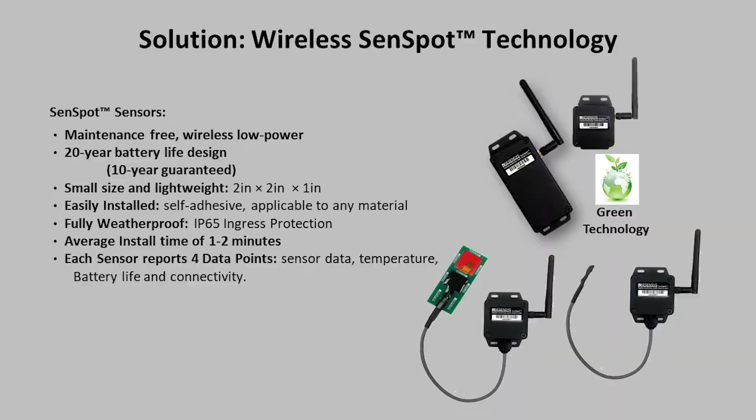So how Resensys works: you're going to put your sensors out on the structure at key points identified. That data goes to a gateway, which is solar powered, about 1.5 feet by 1 foot, small footprint. It has a backup battery for 60 days, so should you be short on sunshine or need power, it has a backup, and it also backs up the data. It can also be connected directly over Ethernet or fiber optic should you have it.

That then goes to a cloud server, an Amazon S3 cloud server, and can be transmitted to the SenScope software. The data can also be pulled directly from the server should you want to use it in your own program or interpret it differently. The Resensys system is highly reliable.

From the data in the field that we have, it's 99.9% readily available. There's a wide spectrum of sensing features. You can do strain, tilt, inclination, displacement, vibration. It's a cloud-based data management system with real-time automated detection.

Rather than give you hundreds of alerts that you really don't want, the software uses AI and algorithms to identify the normal movement of your structure. After about a month or two, it learns that, and you can set threshold values - I'd only like to be informed should this event occur, or it comes out of the threshold value.

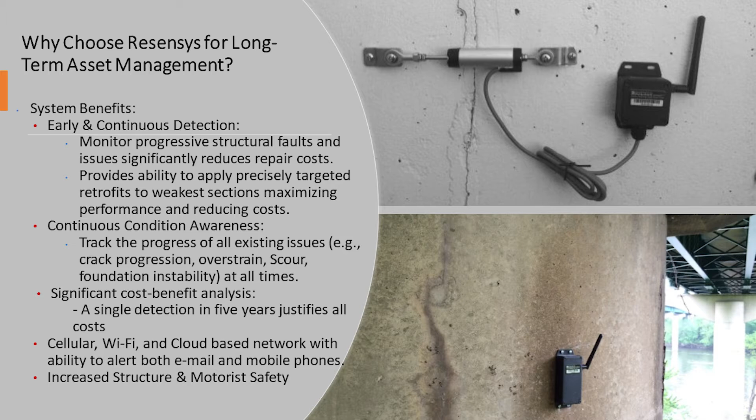It's continuous, and it's also very cost effective, much less than any fiber optic sensor system that's out there. It's a very flexible system - you can use it over cellular connection, fiber optic if you have that on the bridge, and for extremely remote locations, we can do satellite-based communication.

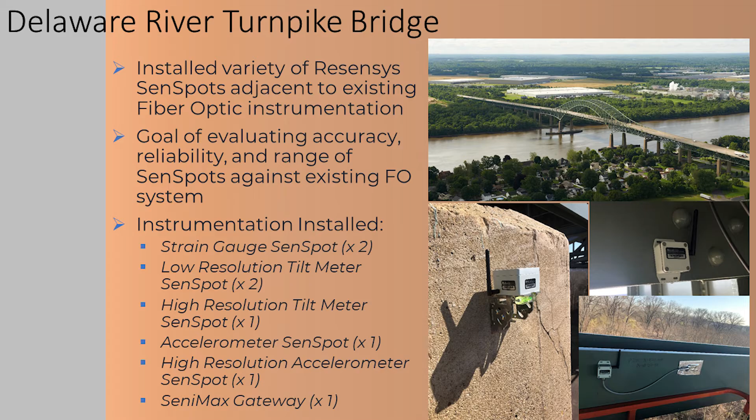One of the most important case studies we did was a direct comparison with a fiber optic system. This was done with WSP and the Delaware River Turnpike Bridge. We came to them a little late in the process, and they were kind of blown away and said, why didn't we know about this? They had already installed the fiber optic sensors, and out of interest, they did a side-by-side comparison with our product. These were the results of the comparison.

You can take all of the data and interpret it any way you want. It's a very friendly user interface.

So if you want to know what your structure was doing at this point last year or five years ago and compare the differences, you can do that.

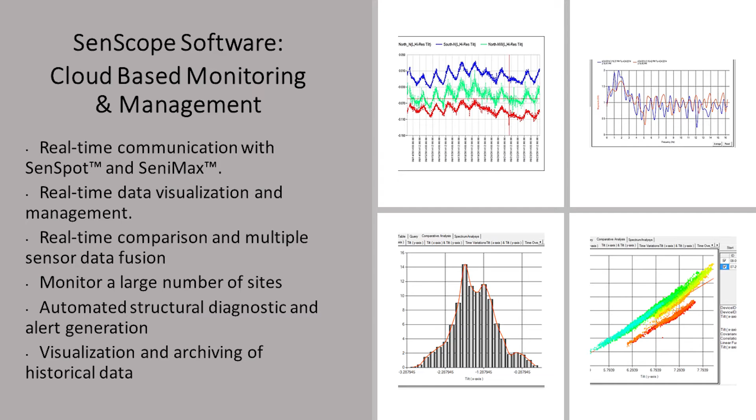You can then view those results. Typically you view it like this, the first top left, but you can then view those results as a chart

For structural applications, we can do bridge piers and abutments, monitor settling, instability, tilt. For the superstructures, strain, vertical displacement, deformation. We can monitor bearings and joints in every aspect - tilt, temperature, strain.

We can monitor vibration and tension in cables. We can also monitor scour now. We have a specialty scour probe that's been in development for some time.

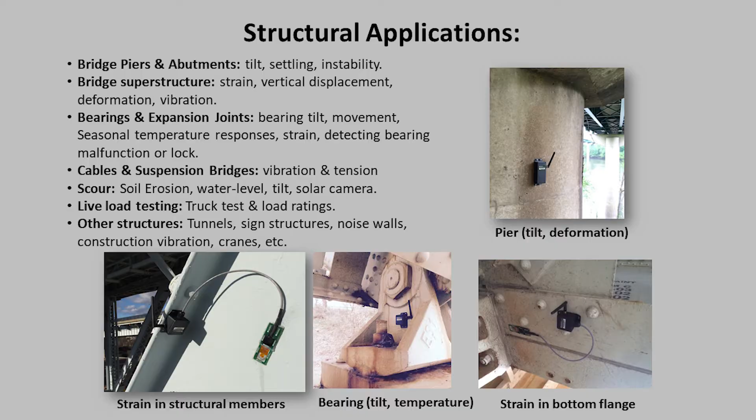We can perform live load testing, tell you when a live load vehicle is going over your bridge and actually take a picture of it. Lots of other structures - tunnels, cranes, buildings.

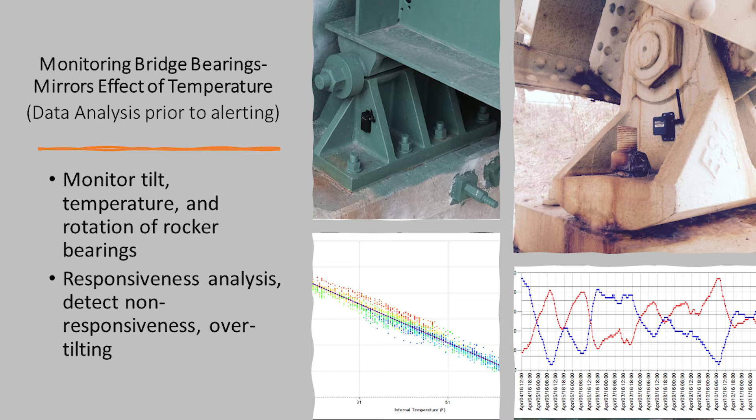It's an example of monitoring bridge bearings. In the bottom right, you'll see this is what a healthy bearing looks like. So you have temperature inverse to the bearing movement.

As I said, we can do long-term live load testing, and we did this very successfully, inexpensively on the Robert Norris Bridge in Virginia.

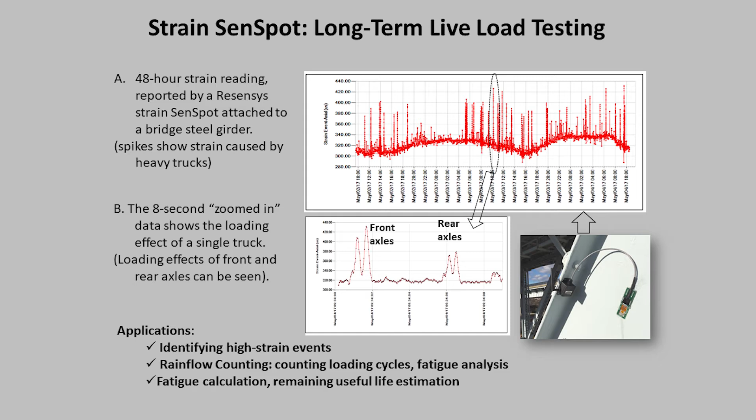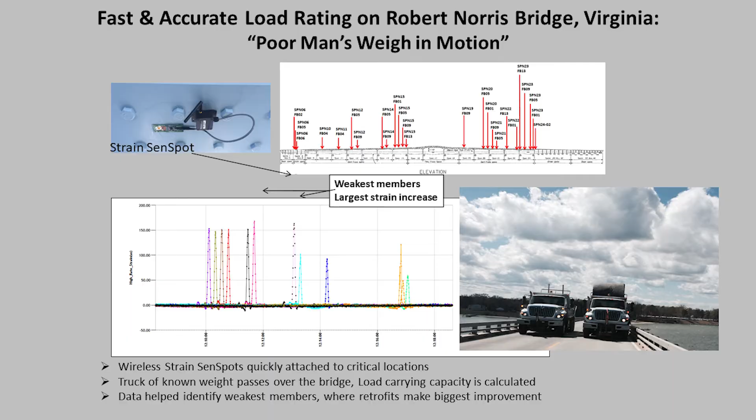They were considering doing a repair and wanted to know where to best focus their assets and funds. So we put out several sensors on the structure, drove two 83,000-pound vehicles over, so they knew exactly how much and where their weakest points were, and they made the retrofit.

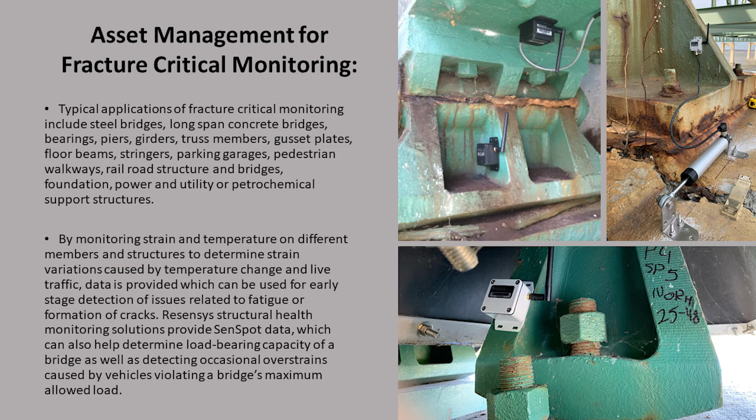Asset management for fracture critical monitoring. By the time you're seeing a fracture in your structure, it's essentially already too late. The costs are much greater than if you can detect that weakness earlier.

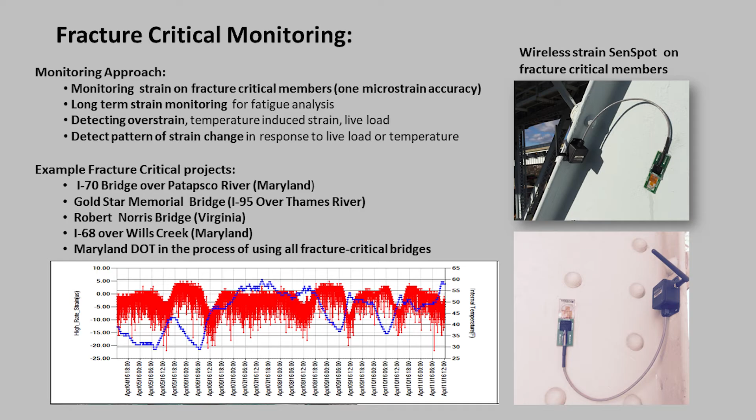For monitoring approach, we monitor typically strain and the bearings, and these are several structures that we've done - I-95, several structures in Maryland, I think about a dozen, the Robert Norris Bridge, and I-68 over Wills Creek.

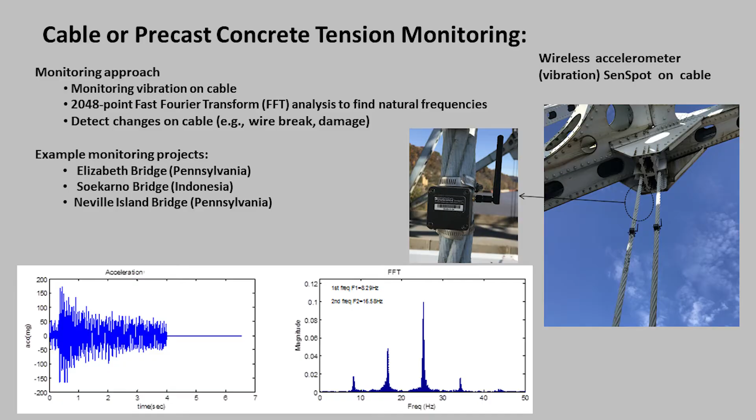Here you'll see the two ways that we can monitor the vibration and tension on cables, or precast concrete tension monitoring. Another project that was very well discussed earlier in the week was the I-40 Desoto Bridge.

On that structure, they found a critically broken beam or girder. It was a three-phase repair effort. We installed 42 strain monitoring sensors in less than 48 hours.

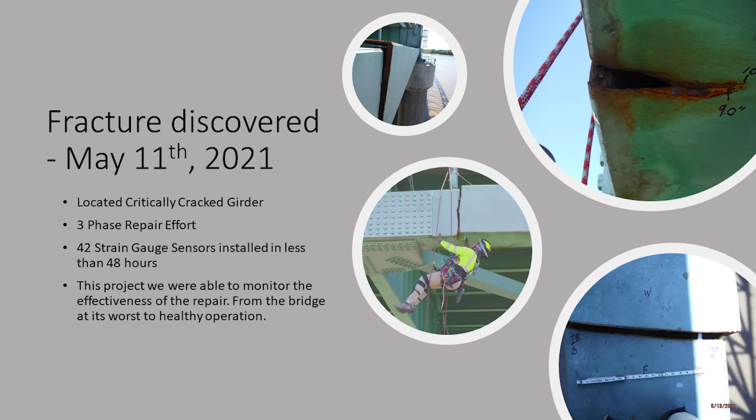And that gave them the ability to quicken the time for the repair and really know what was going on with their structure. It's kind of an inverse as to what we typically want to do.

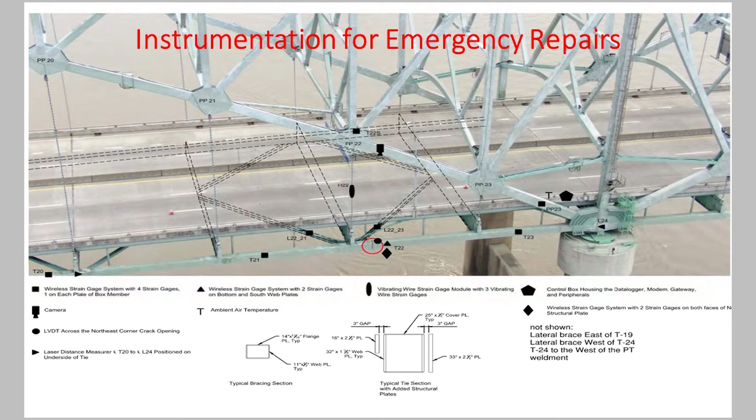We want to monitor a healthy structure and fix it when it's starting to wane. For this project, we were actually able to monitor the structure at its worst and then monitor the repair and how effective that was. This is just a guide of where the sensors were placed throughout the structure.

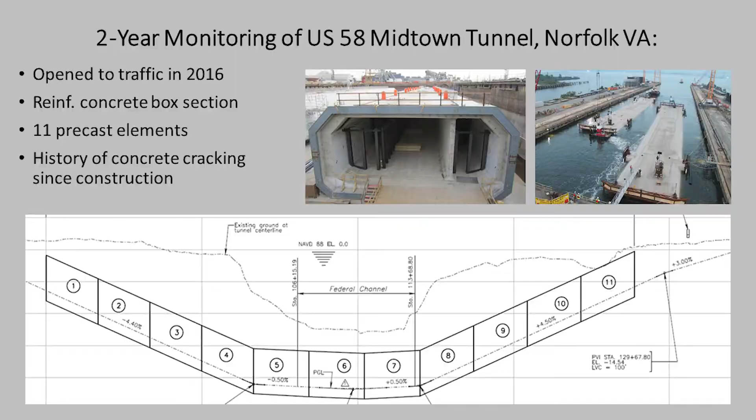Another project that we did was the two-year monitoring for the Midtown Tunnel in Norfolk, Virginia. They were having some concrete issues in their reinforced concrete sections. So we did pretty extensive work here for over two years.

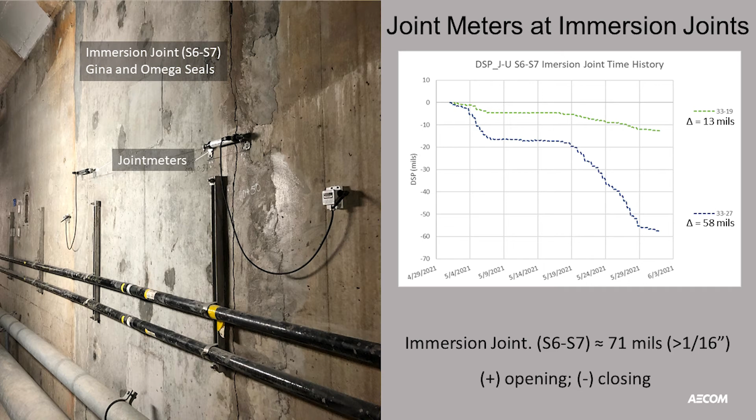Here you'll see some micro crack meters, joint meters at the portals, at the immersion joints, biaxial tilt meters, air surface and profile temperatures. Each sensor also reports temperature in one degree Celsius increments.

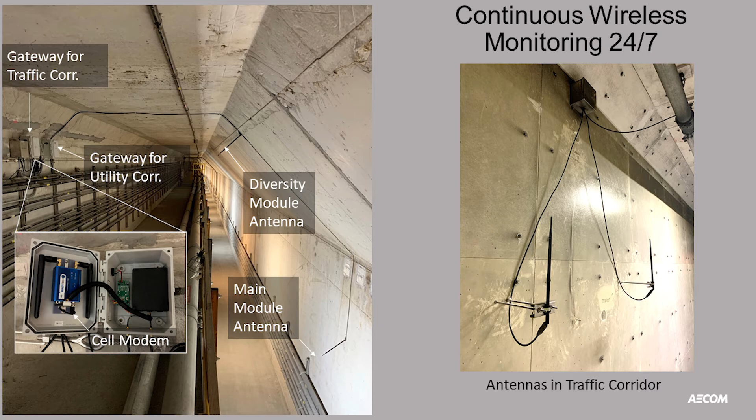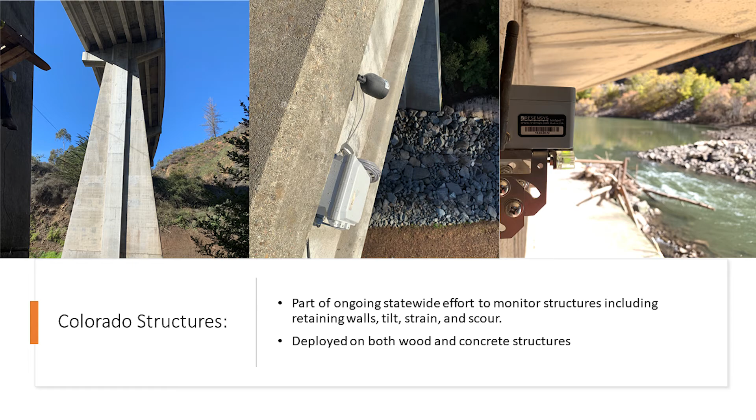We're also working with the Colorado statewide program to increase and structurally monitor their structures. Currently we're doing retaining walls, monitoring tilt, strain, and scour is their next project coming up. We've been deployed on both wood and any other surface you can think of, and the sensors function just the same.

One of the newest developments, or developments that's been in progress for some time, is continuous monitoring of scour.

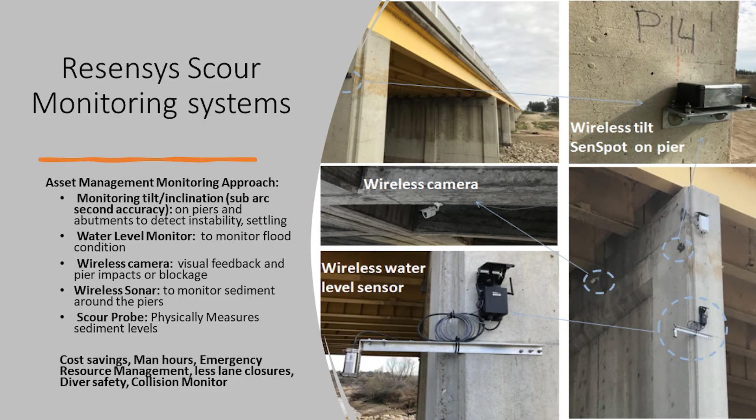So we have a suite of tools that allow us to do that, including an ultrasonic water level sensor, a wireless camera to see what's going on the site, if there's debris building up, and where the water level currently is. Now we're also monitoring the tilt on the structure.

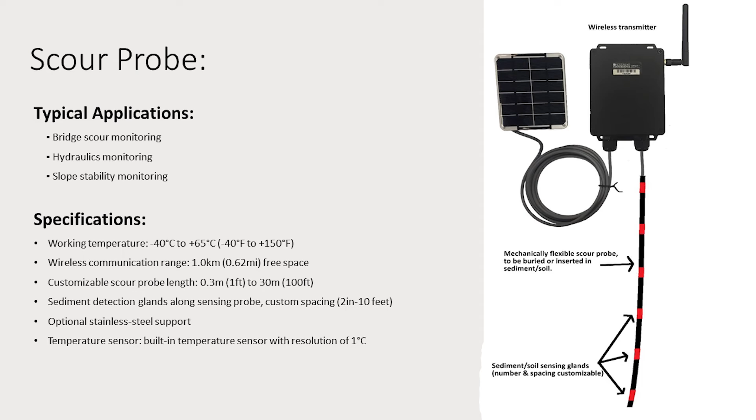Now we actually have a Scour Probe that's highly effective. It's completely solar, so you would set the solar panel above the water line somewhere right below the bridge. That then goes to the transmitter, which you would also place at a high level. Each one of these red dots or lines is an accelerometer, and that's going to detect, if you buried it in the soil level, where your scour is happening.

If it's in the soil, it's not going to be moving. If it's out of the soil, the accelerometer is going to pick up the water flow, and you'll be able to say, okay, that's my water table. And it doesn't have to be just installed vertically. It can be installed laterally, tied through some rocks, bearings, or laterally through the soil.

Texas DOT was having a major problem with barge impacts and collisions. Essentially, the barges were just banging off the piers and driving away. This obviously causes major problems for the stability of the structure, and we worked with them to develop a self-sufficient system to detect when these impacts happen and to be able to record who impacted them.

For that, we typically use a solar-powered camera and vibration and acceleration sensors. This would be the setup here, with the cameras and your sensors placed here.

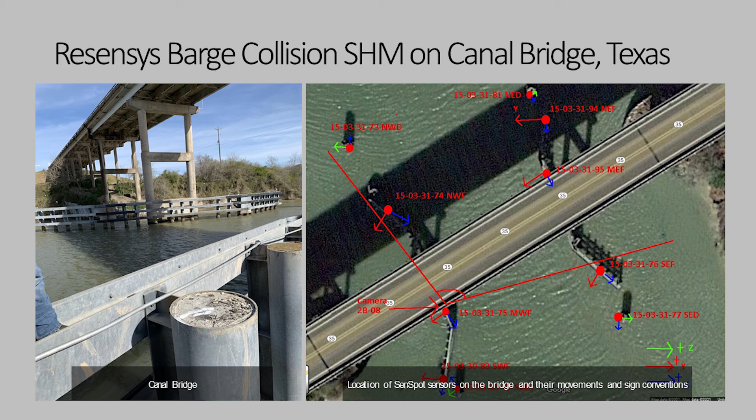So the first step that Texas DOT took was installing buffers so they didn't hit the piers directly. Instead, they were just slamming off the buffers. They approached us, and we came up with a solution: every time they were hit, take a photo. Each barge has its own unique GPS identification tag, so we could clearly say, you hit our bridge here, here's the fine.

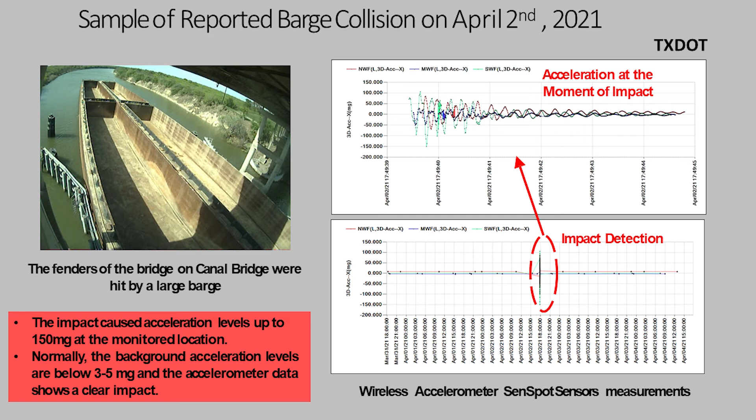So this is one example of the impact, and here's another, much larger impact. In conclusion, it's a very cost-effective asset management system.

We like to call it cheap insurance. You can monitor your worst structures for a long time for very inexpensive cost. You can monitor the critical components, members, bearings, piers. You just tell us, we'll work with your engineers to identify those points, and we can essentially monitor anything you want for an expected at least 20 years before somebody has to go out there. It's very much a plug-and-play system, and it's very flexible in what the user needs and wants.

That's my presentation. He asked if there were any solutions we have for hitting, such as signs or overhead structures, where you're not passing the minimum clearance. We can do that. Essentially, we would place a vibration or accelerometer on that structure and a camera right next to it, so anytime a sign or something was hit, you would get a warning or a notice.

And we're actually discussing that exact solution with the Long Island Railroad.

So the question was, what is our cloud provider? We use Amazon S3 enterprise servers.

So the question was about temperature capabilities, implementing the temperature capabilities.